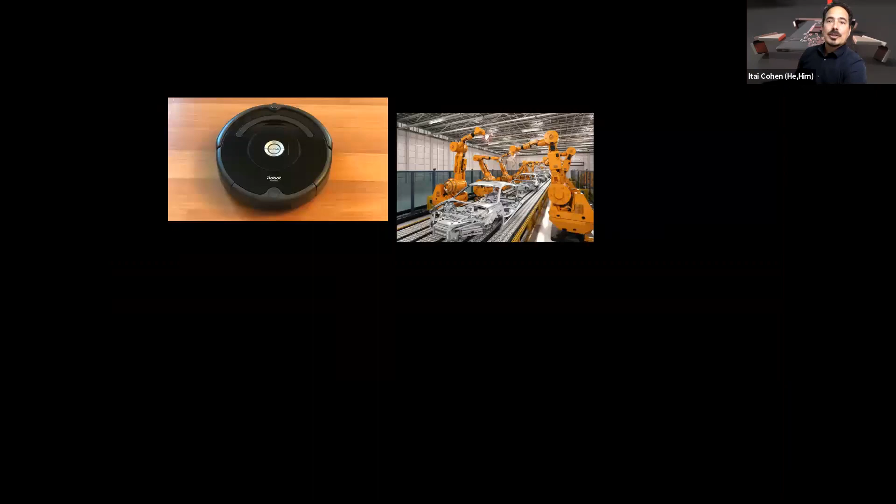Okay, so let me start by asking, what is it that's so fascinating about microscopic robots? Well, let's think about what robots do for us at the macro scale. At the macro scale, robots have really revolutionized our society. They sweep our floors, they make our cars for us, they transport people from one location to another. They organize our warehouses. They're used for surgery, and they explore distant planets. And the overarching question is what would it take to shrink robots with this degree of functionality to the 100-micron scale?

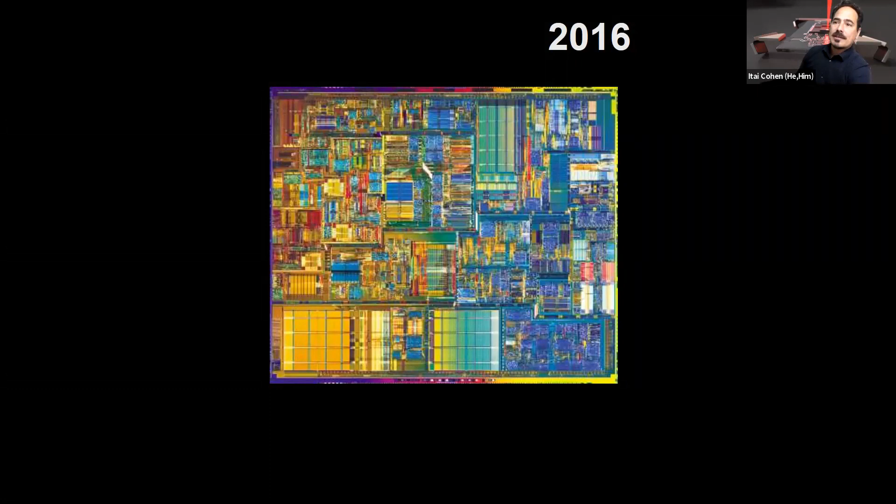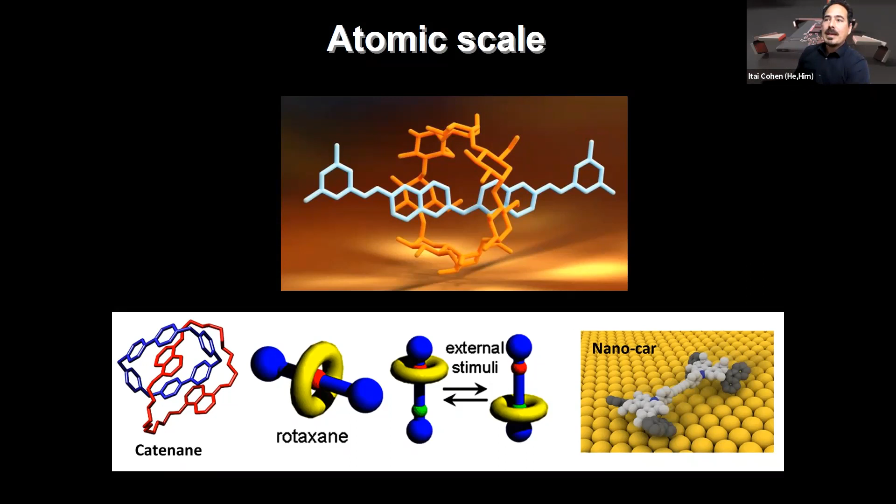And on the very bottom right is what I can only assume is the world's slowest car. It's a nano car where the rings that make up the tires rotate by some angle every time you put in a molecule that causes a reaction that twists the wheels. So these are spectacular achievements, and the synthesis that was required was really phenomenal. Still, they leave you kind of cold when you look at all of the amazing things that biology can do at this scale. At this scale, biology can create machines that cleave polymers.

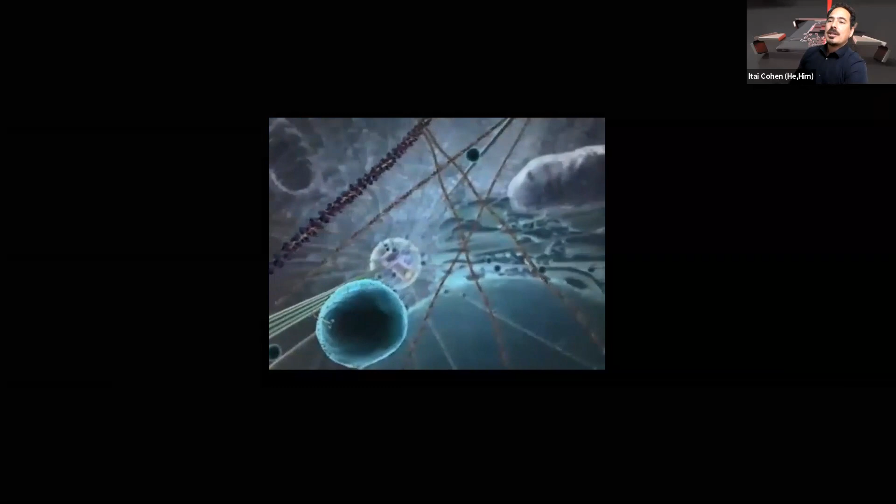They make polymers, they unassemble and assemble them. They can have little motors that carry cargo and walk across microtubules. You have pores that can open and close, letting certain chemicals in and out. You have a vast infrastructure of fibers that are controlling the rigidity of the cells or the pulling apart of DNA.

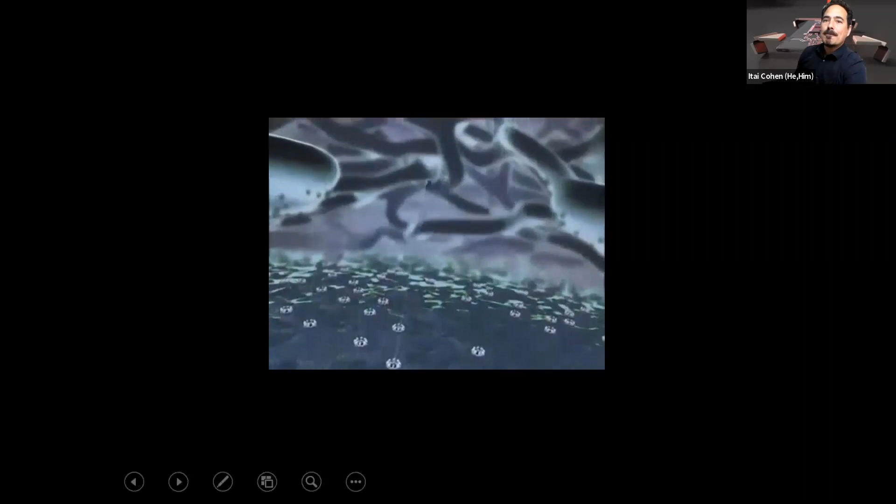And really, my feeling is that if you wanted to start working on machines at the molecular scale, you'd get a lot farther by just hacking biology, using all of the machinery that biology has already created, making variations in the DNA that codes for these proteins, and then using that approach to essentially search the space for something that does what it is that you want it to do.

Now, if you start looking at a slightly larger scale of microns, then a new technology comes into play, that of electronics. And the idea here is that we have an opportunity to make machines at the micron scale, which now take advantage of a different technology, one that is complementary to biology, and it's that of electronics.

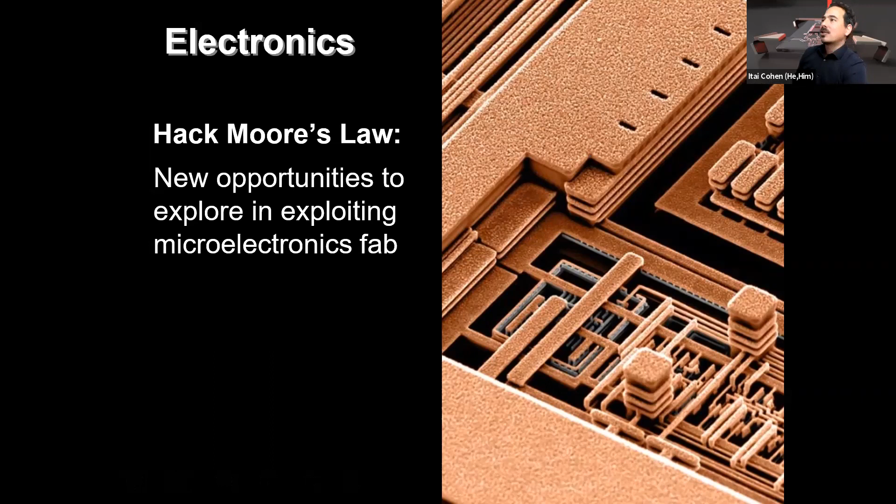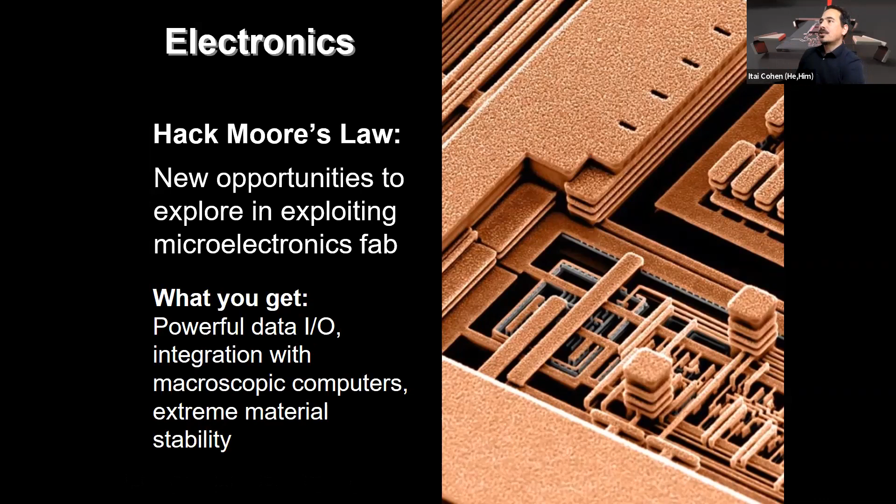And so the idea is that you could try to hack Moore's law, try to use all of the infrastructure that we've developed for electronics, and then use that to essentially make the brains of the robot, if you will. And now what's missing is how to marry that with the mechanical aspects that we want to make interact with that brain, or that we want the brain to control.

So let me start with the brains of the robot. I said that Moore's law allows you to create the brains. That's a solved problem. What is not a solved problem is taking that computer chip and moving it off of the wafer. This is something that John Rogers has been spearheading, and I want to tell you a little bit about the kinds of things that my colleagues are doing here at Cornell along those lines.

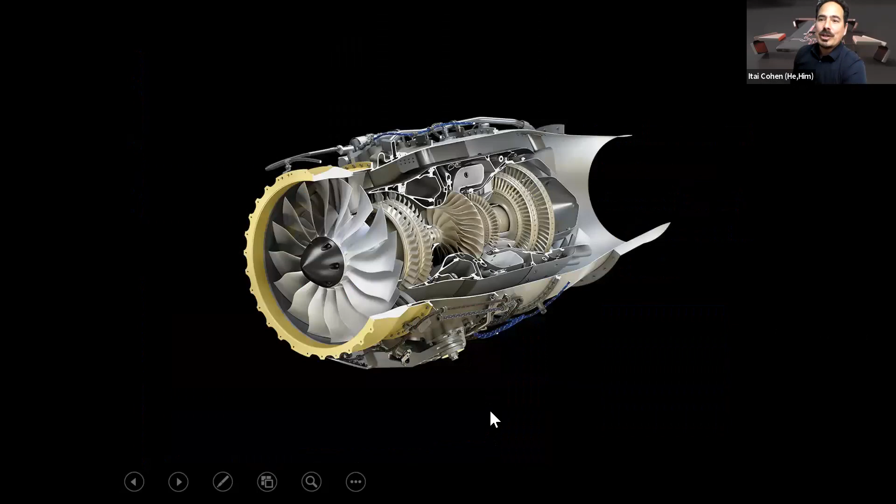So what we wanted to do is try to think about how could you start to marry the kinds of things that people are doing in this locomotory part with the kinds of devices that Al and Paul are making. And this was the task that we gave Mark Miskin, our postdoc at the time, who was leading our effort. Okay, so you might think, well, what's the problem? Let's just take machines as we know them and just try to shrink them down to the micron scale. This is a hard thing to do.

People have tried. So for example, here is an example of a micro turbine engine. It was made by the Epstein group at MIT. This was a $10 million effort that resulted in a very deep understanding of why it's not possible to simply shrink machines down to the micron scale and have them work. So this device never worked.

And the reason it doesn't work is that there's some physics that changes when you go from the macro scale to the micro scale. Fluids become viscous. Electrostatic forces inhibit surfaces from moving past one another. And of course, the assembly of these machines becomes more complicated. It's hard to shrink down your graduate student to the micron scale with a little micro screwdriver and get them to assemble something as complicated as a jet engine.

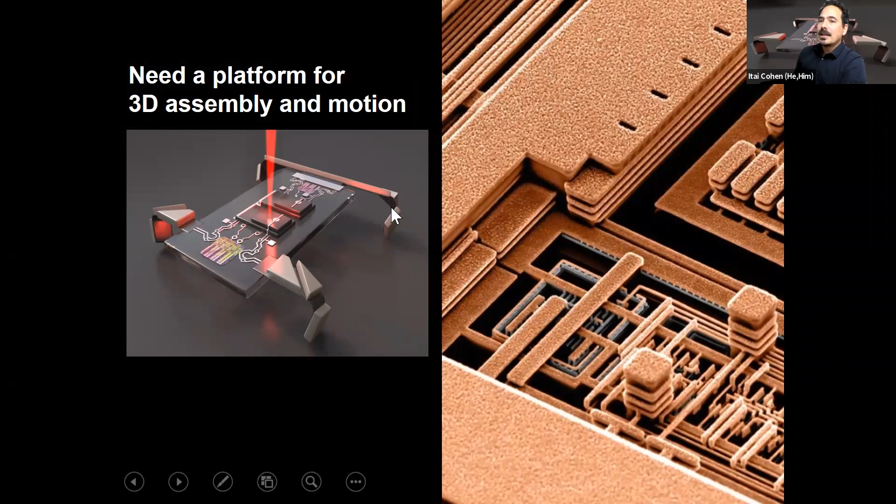So it really seems that if we're going to start to make machines at this scale, we're going to need a different approach, and the one that we're going to go after is to use the same techniques that people have been using to make computer chips to print a 2D robot, which then, using the rules of origami, folds itself up into a 3D robotic structure.

Let me stop there and just ask if there are any questions and if what I'm saying is clear so far.

Well, sorry, just to participate, and it has nothing to do with your wonderful talk thus far. What was the conference that you were at that sent you fleeing from rocks? Yeah, it was an Army conference on water. You know, it's kind of like a water scarcity thing. Yep. Yeah, so that was the conference. What a change! Phenomenal transition. Yeah, I mean, the stuff that I was doing there was on colloidal suspension. So it's stuff that we still do, but certainly not in the way that we did it at the time.

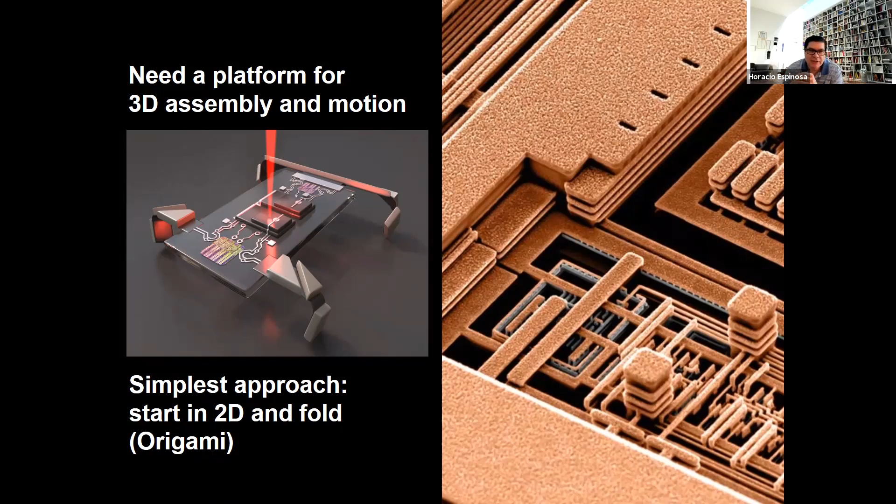Good. Is everything I'm saying so far clear, Ed? Yeah, I was going to ask if you could just say a little bit about why origami. Yep, I'll get to that in a second. Great. Okay. I was also interested in, maybe you will explain, what do you mean by origami rules, but maybe that is what is coming. Yep. So if these are the questions, let me continue.

All right. So why origami? Well, it turns out that origami has undergone a revolution over the last decade, in part spurred by an effort in the NSF to link up origami artists with engineers in order to take advantage of this 1000-year-old art form to make structures, devices, machines and metamaterials that have engineering purposes. So today, you can take a course at MIT on a program called Origamizer.

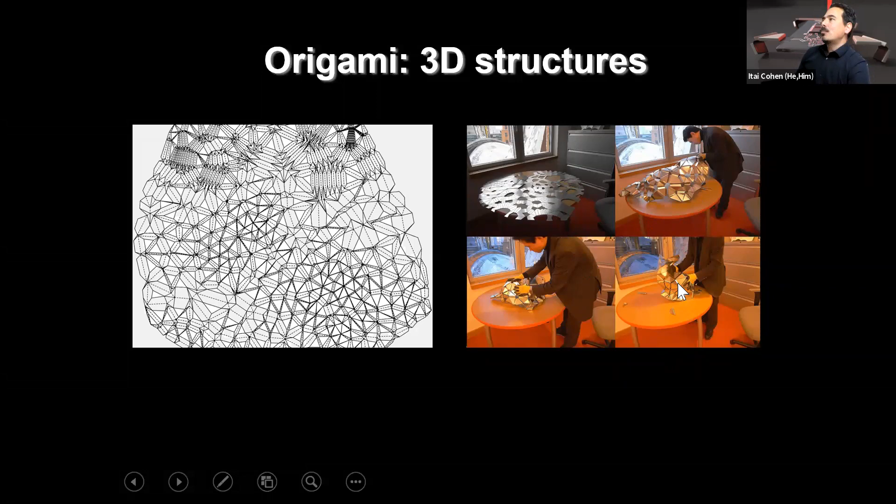Origamizer takes any 3D shape, it scans it, and then it spits out a folding pattern for that shape. So in this particular case, this origami pattern, if you have an origami master like Tomohiro Tachi here folding it for about 8 hours, will essentially form the Stanford bunny, okay? So any shape that you want, basically, we can form using origami.

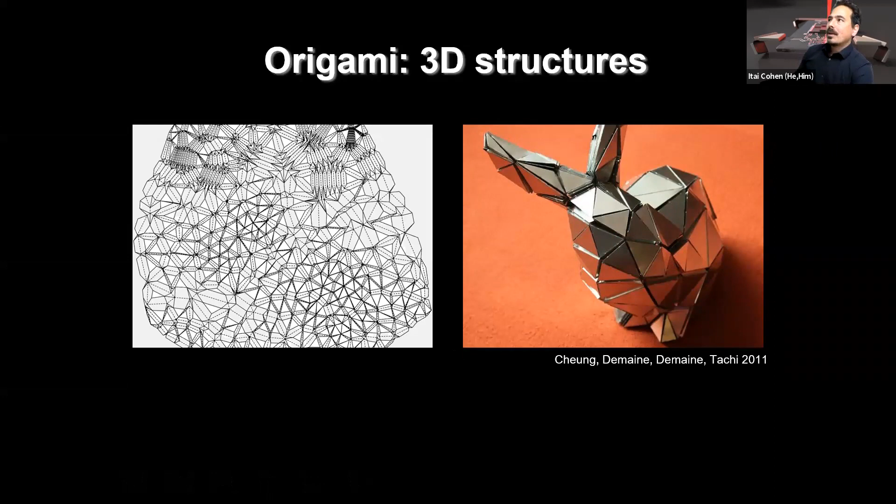My group was involved in this effort in the aspect of mechanics. So what we were interested in is how do you take origami materials and use the way that they're folded to imbue the mechanics that we're interested in on these sheets. So for example, if you take a normal Miura-ori sheet, and if you look at panel C here, if I pop through defects, I turn a valley into a mountain in a particular order, I can pop those defects in so that I can create a hinge. And so this sheet can essentially fold on that hinge.

If I take that same sheet and I pop a different configuration of the defects, I can make a rigid spine that does not allow any folding. So now the sheet is rigid along that spine. And in fact, we showed that you can pop these defects in and out at will to reprogram the mechanical behavior of this sheet and make it stiffer, make it so that it can't bend in certain ways. All of this just by popping these mountains and valleys into one another.

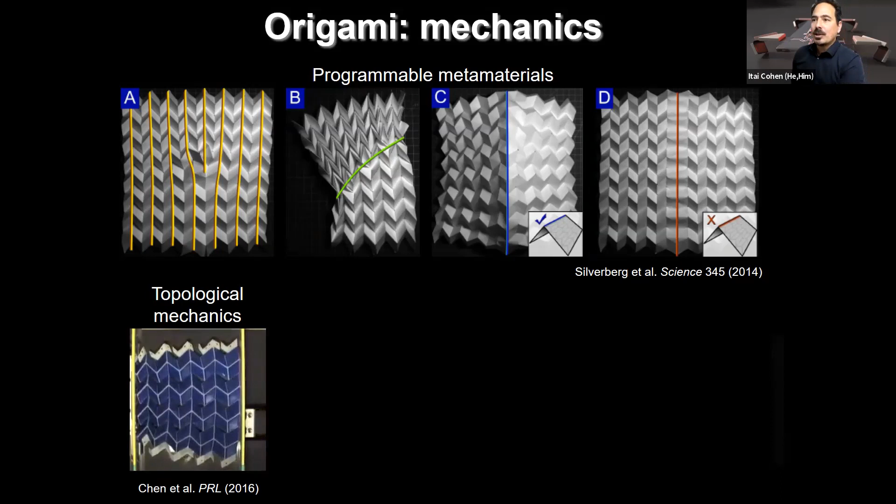In another piece of work, we showed that by changing the pattern of folds, you could create a topological mechanical material where if you compress it, only one side of the sheet deforms. This is the equivalent in the topological electronic materials of having the current only going along one edge of the material. We showed how to create bistable switches. In this case, you're seeing a device that folds or essentially snaps between an open and a closed configuration. This is the square twist.

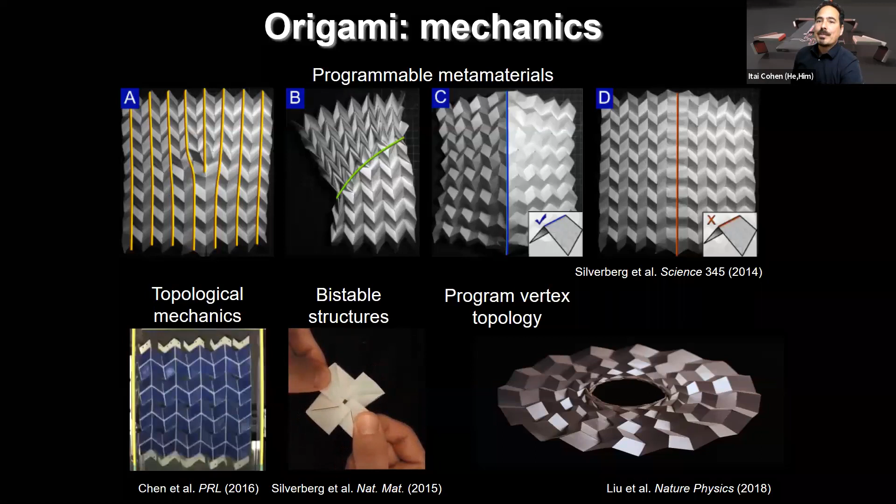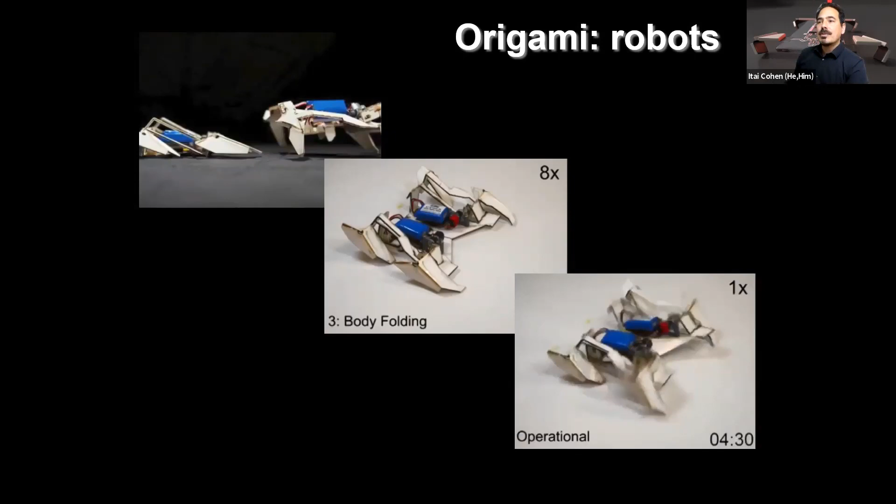Now, admittedly, 80% of these robots caught fire as they were running off the stage, but you get the idea. The vision of printing something in 2D and then getting it to fold itself up and walk, that's a spectacular idea. And we know how to do the shapes, we know how to do all of the mechanics. And so the only thing that's remaining is to shrink it down to scale. And origami happens to be a terrific platform for that, because as long as you keep the ratios of the panel to the sheet thickness the same, you can essentially create the same structures in the macro scale as you do at the micro scale.

So in this particular case, you're looking at a Randlett bird. This one is made out of paper. This one was made by Ryan Hayward's group out of a polymeric material that expands with temperature. It's poly-NIPAM. You take the poly-NIPAM, you sandwich it between two rigid plastics with different gaps at the creases. So if you have a crease where the gap in the top is bigger than the gap at the bottom, when the poly-NIPAM expands, it's going to bend because the top has more room to expand. And that creates a fold, and that's what allows you to make this bird at the micron scale.

Now, if you want to go even smaller, and if you want to start to think about integrating hard materials from the fab, you really need to think about what paper you're going to use at this scale. An origami artist is only as good as their paper. And so right around the time that we were starting to think about this, Paul and his colleagues were starting to experiment with the thinnest paper that you could possibly imagine.

This is a single sheet of graphene that Paul's student, Melina, is pulling in between these two pads. And what you're seeing is a kirigami pattern. Kirigami is where you make cuts in paper that have this staggered shape. And what Melina's doing is she's pulling the pad and then extending out this kirigami pattern, but now in a single sheet of graphene. And so we've then gone on to make other types of paper.

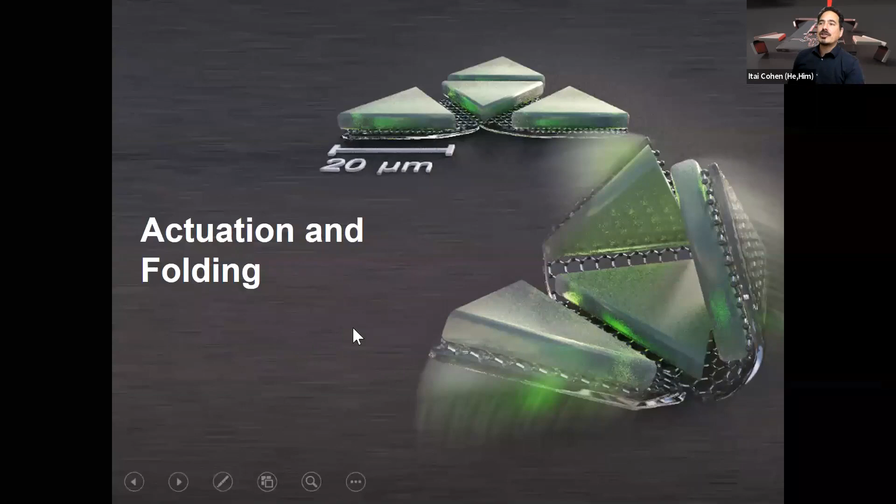Okay, so let me tell you about some actuation and folding ideas. I'll tell you about 2 methods that we've been trying out. One is chemical and the other is voltage driven. Okay, so if you want to self-fold something, what do you do? Well, first, you have to take your device and you have to make it asymmetric so that it only bends on one side. Essentially, you're making a bimorph.

Bimorphs used to be used as little switches, little fuses. It's like when you take 2 pieces of metal, slap them together. If they have different coefficients of expansion, one side will expand more than the other, and you'll get a bend. All right, so in this particular case, our bimorphs are going to be atomically thin sheets, but it's the same concept.

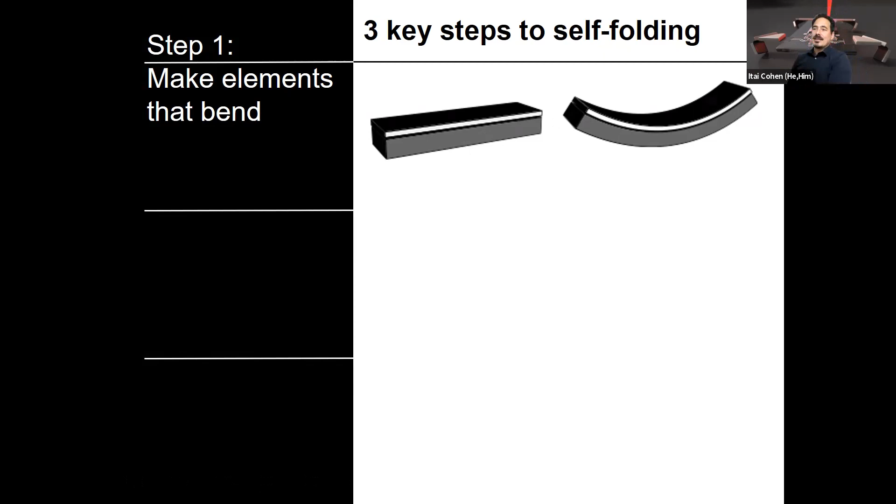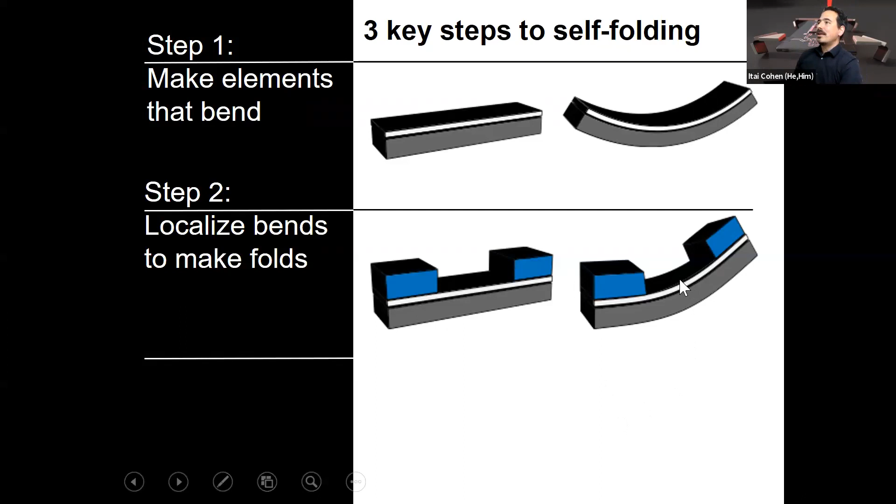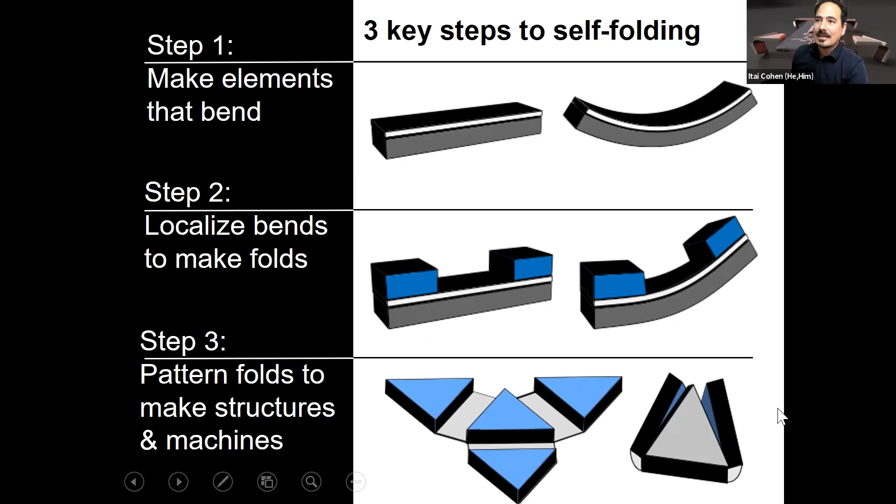Then, if you want to localize this bending, what you can do is you can put massive panels, little rigid panels that prevent the bimorph from bending underneath them. That restricts the bending to a fold. And then you can make your fold pattern follow any kind of origami that you want in order to generate a 3-dimensional shape. So that's the strategy. Let me show you how we do it.

So this is work that Marc Miskin did. What you're seeing here are the plastic panels, and what's really devious about this video is that the hinges, they're invisible. You can't even see them. The hinges are made out of 1 sheet of graphene and 2 nanometers of glass. That's our bimorph. And what Marc does in this video is he puts some acid on, and that closes the structure. And as the acid diffuses away and the system becomes more basic, the structure essentially opens back up.

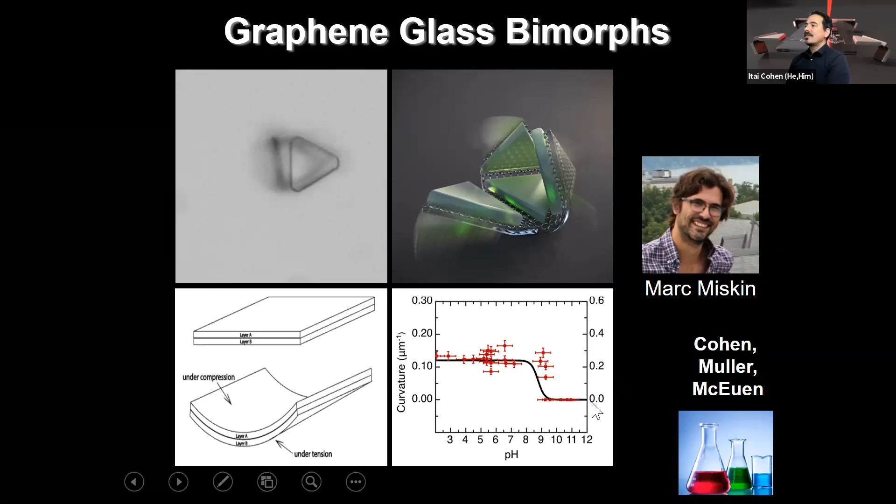And so what you're seeing is that the glass, in this particular case, is responding to the pH that we're using in the material. And it goes something like this, that when you're at high pH, the glass opens up and has a curvature that's 0, it's flat. When you're at low pH, when you put some acid on, that's what makes it close up. So the chemistry behind this is, of course, spectacular.

This has a very rich and storied history dating all the way back to Josiah Willard Gibbs, who was interested in equilibria between solids, chemicals diffusing into solids, and the solutions that the solids are embedded in. And so way back when, in 1906, people already knew that you could use glass as electrodes, as little storage devices for ions. And eventually Kistler and then Larche and Cahn started to understand that if you used, for example, sodium nitrate or potassium, you could essentially create stresses in cover slips that either bowed them out or bowed them in.

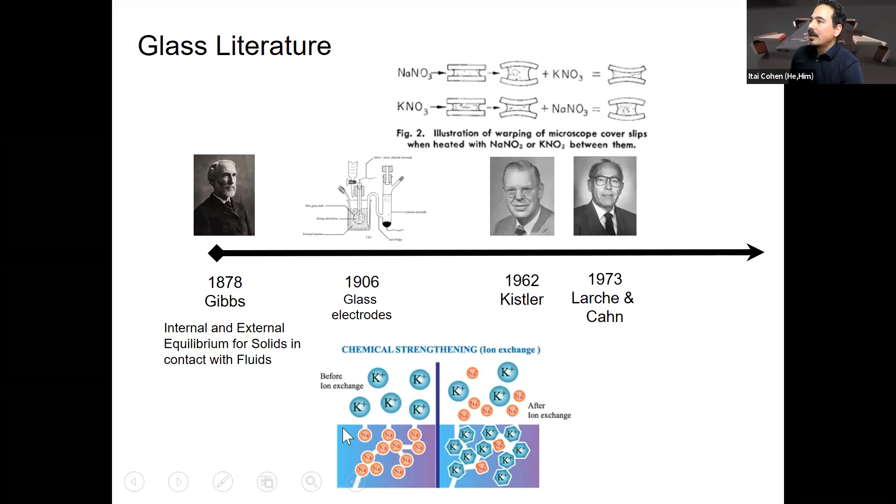And Larche and Cahn really figured out the mechanism that's at work here. What they showed is that when you put potassium into solution, the sodium in soda lime glass, so all glass is made with soda lime and has sodium ions in it, the potassium ends up displacing the sodium, and that expands the glass. So when you put in potassium, the surface that's in contact with the solution ends up expanding relative to the other surface, and you get bowing of the cover slips.

And when you do the opposite, when you put in a large amount of sodium, you displace the potassium, and now the cover slips can bow inwards. And so this, of course, is the mechanism that you all know about, because it's what's used to make the glass in every single one of our cell phones. So this is an amazing piece of engineering where you essentially take soda lime glass, you dip it into a potassium-rich mixture, and that creates a potassium-rich surface to the glass.

Now, when you scratch a Gorilla Glass, what happens is that instead of opening up, the system is under such stress that the scratch actually closes, because the potassium is trying to expand the glass, and so it closes into the crack. And that's why Gorilla Glass is so tough. It doesn't pull on the cracks, it actually closes them up. Amazing. So this is exactly what we're using to do our bending in this particular case.

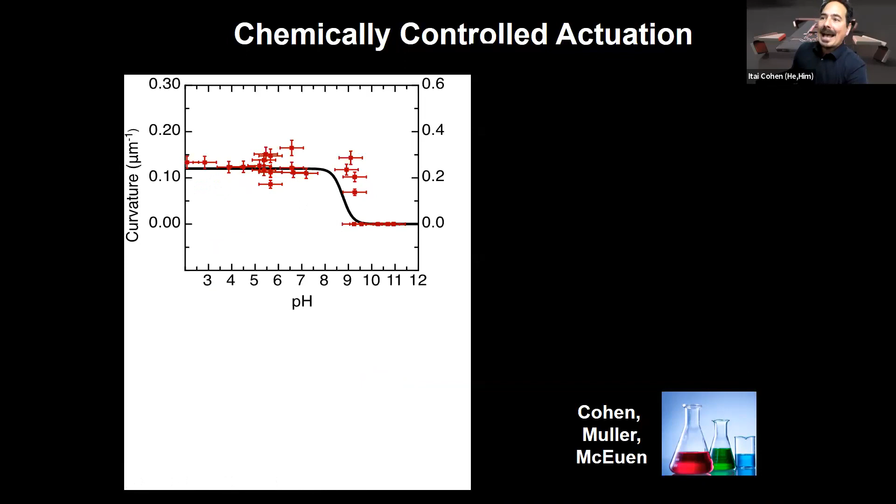All we're doing is replacing the sodium with acid molecules, H3O+, and the idea is that the acid diffuses into and out of the glass. When it diffuses in and displaces the sodium, it essentially swells the glass, and when it diffuses out, the glass returns to its normal state.

And so we can fit all of this data with this black curve, and that has the form which is just 1 over the rate constant, which is pH dependent and sodium dependent. So if we change the sodium concentration, we can change where this transition happens. And if we change the pH, then we get this nice step function from one state to another.

And all of this happens super fast. This folding and unfolding that you saw happens quickly because it's all just taking place at the nanometer scale. All you're doing is replacing the very surface of the glass, and the time scale goes like the diffusion. So if the length goes very, very small, then that time scale becomes minuscule. And that's why this thing happens at the sub-second time scale.

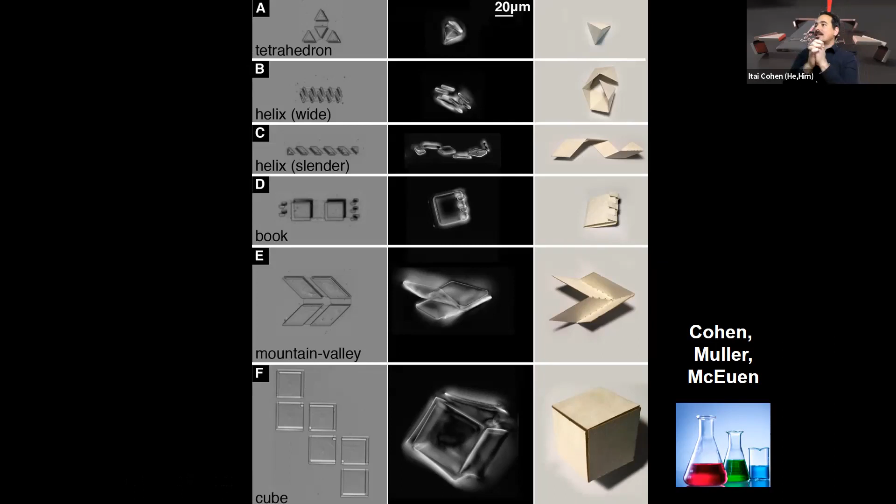Okay, so with this, we were able to make all sorts of devices, little tetrahedra, little spiral shapes that could be used as antennas, a book that closes on itself and clasps shut, a cube. And this particular image of the cube graced the cover of PNAS.

And we got a lot of attention for this, including from Breitbart News. That's right, this is no longer fake science, it's real stuff, and you can believe it.

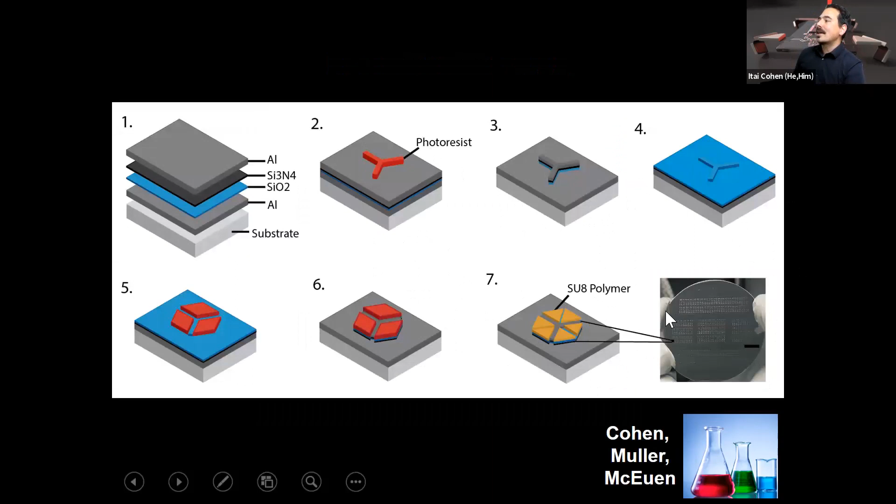That relationship between curvature and pH almost looks like it's just piecewise constant. Is there something desirable about making it a smooth function? I would say that this is kind of a log scale. pH is a log scale. So the fact that it's going down pretty sharply basically makes it like a switch.

There is some smoothness, and you can try to do that in the delivery, but the device itself, the stresses, respond. So the higher the concentration gradient, the faster this thing will go. So it really depends on the delivery of the acid, how quickly this thing will snap down. Thank you. Fascinating.

Any other questions about the chemical actuation? So Itai, have you ever tried soft materials? The same phenomenon instead of using glass, because certainly polymers or other organics could respond similarly, particularly if they're charged. Yep, absolutely.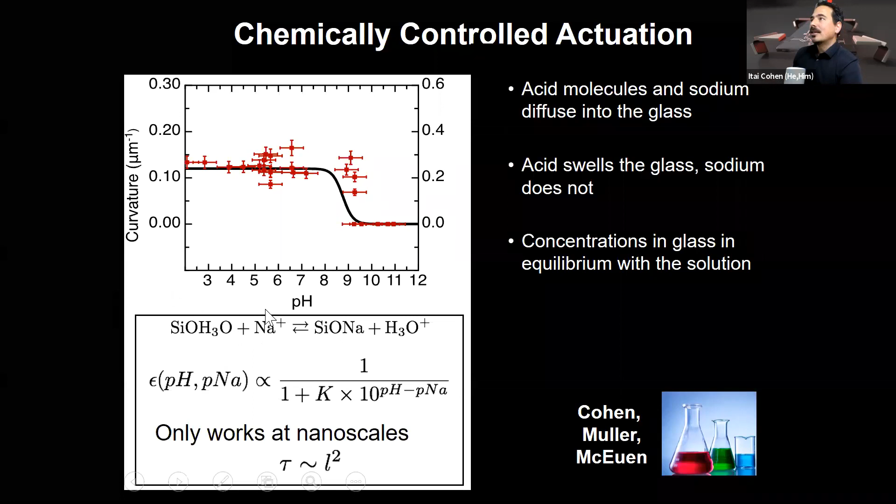I mean, you can also introduce light responsive. Yep, you can do azobenzenes that are responsive to give you liquid crystals that essentially can be disordered and ordered. We're pursuing those kinds of things. Yep. Great. Okay, let's hold off on the rest of the questions.

Let me tell you about another process that we've been developing. So this one is an electrochemical actuation. What we do here is the bottom layer is going to be made out of platinum. The top layer is just an inert capping layer. It could be either graphene or titanium dioxide or something like that. And when you put a voltage on the platinum, you can adsorb anions onto the surface. And those ions essentially create a surface stress. And that bends the sheet because the other side is not adsorbing ions, so it's not feeling that stress.

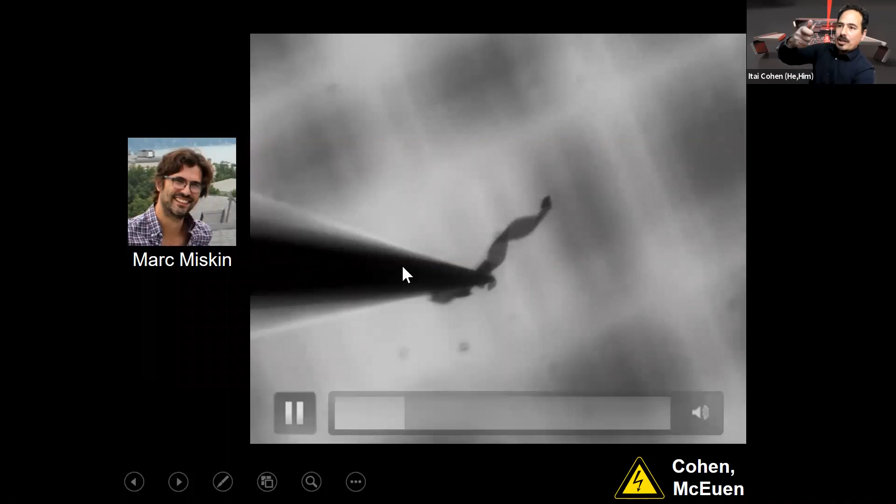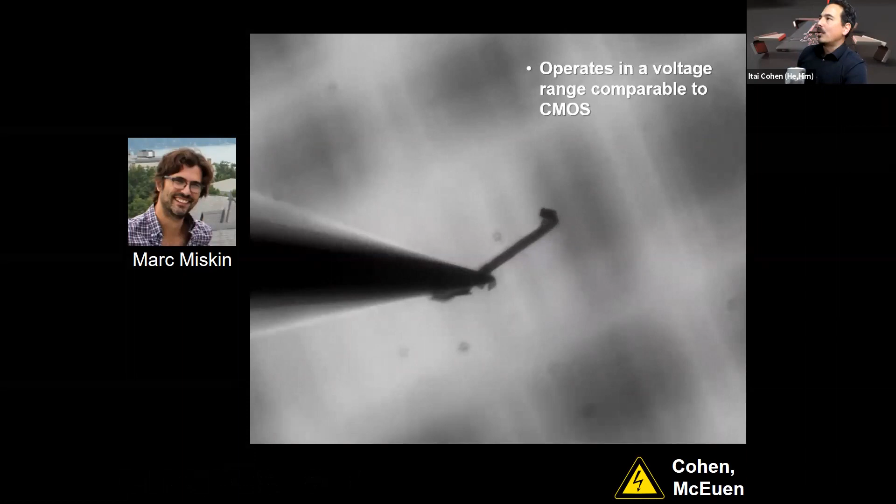So if you do this, then you can pick up one of these devices like Marc is doing here with an electrode, and all you've got to do is tune the dial, and this sheet will bend and unbend on command. Okay, it's really an amazing piece of engineering. And this device operates at voltages that are comparable to CMOS, so less than a volt or so. It consumes very little power. It's rate limited by the viscosity of the water that surrounds it. It works in cell media, and it integrates with the electronics fab.

So let me tell you some of the things that we're trying to build off of this technology. So one of the things that we've thought about is, could we start to think about creating artificial cilia? So as you all know, in your body, there are two main methods for transporting fluids. One is the circulatory system. Your heart is putting pressure on some fluid to drive it through the channels that are your arteries and veins. And that technology, I should say, has been developed into an engineering field called microfluidics, a major field in engineering.

But there's another technology that the body uses to transport fluid, and that's cilial transport, where cilia can essentially locally move molecules of fluid across surfaces. And this cilial transport, we haven't really figured out a good way to incorporate it in engineering devices. And part of that is because the best cilia that we can make right now are magnetically actuated, which is difficult to change. Other electronically actuated cilia use voltages in the range of 1,000 volts. But here we have a chance to make little cilia that are operable at the volt range. So let me show you the kinds of things that we can do.

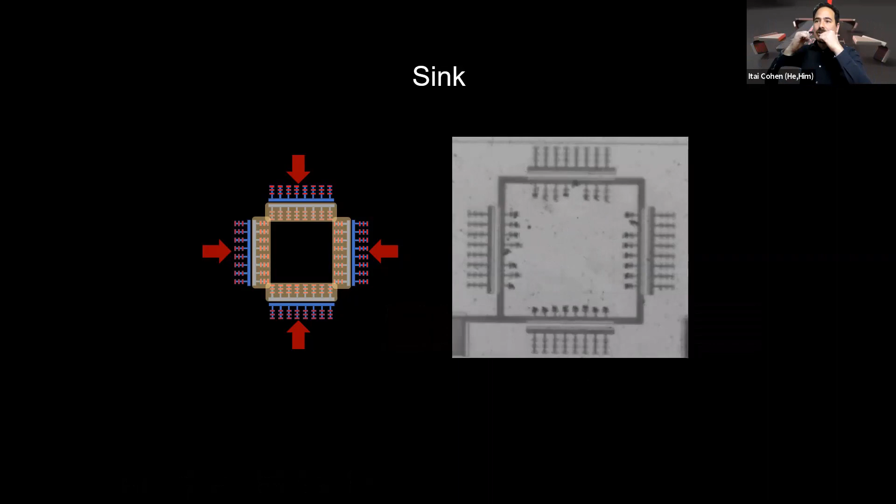That creates a sink flow. And the flow is coming in and then moving out of the page into the third dimension using the cilia transport. And of course, I could actuate any number of combinations. So for example, if I actuate all the outer ones, I get a source where now the fluid is coming in from above and going out in plane, or just parallel transport, or I can get a saddle shape where they come in from above and below and out through the sides, or just a turning flow.

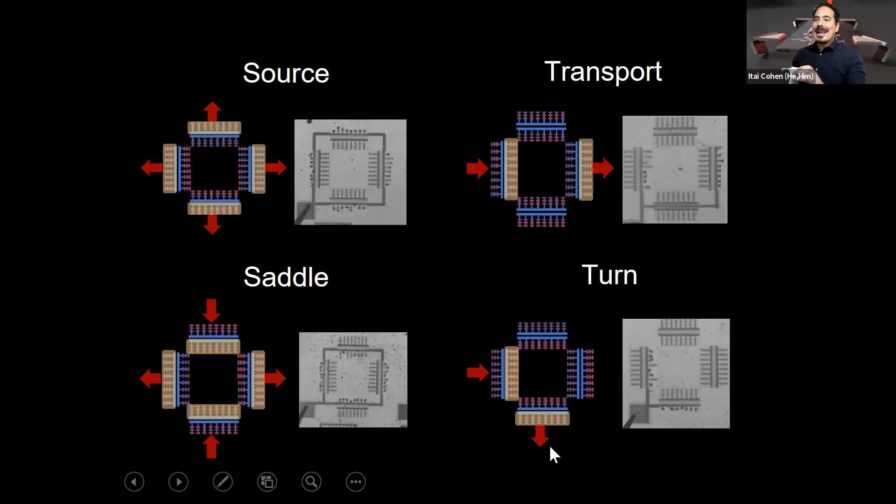And now if I have a whole array of these, I can essentially create a flow pattern in the top part of the array that sends the particles going in this direction. Whereas if I actuate the bottom ones in a different pattern, I can get a completely separate pattern. And maybe if these two are operating together, then only in this regime where the two flows are near each other, do you start to exchange materials between the two flows as this fluid is being directed.

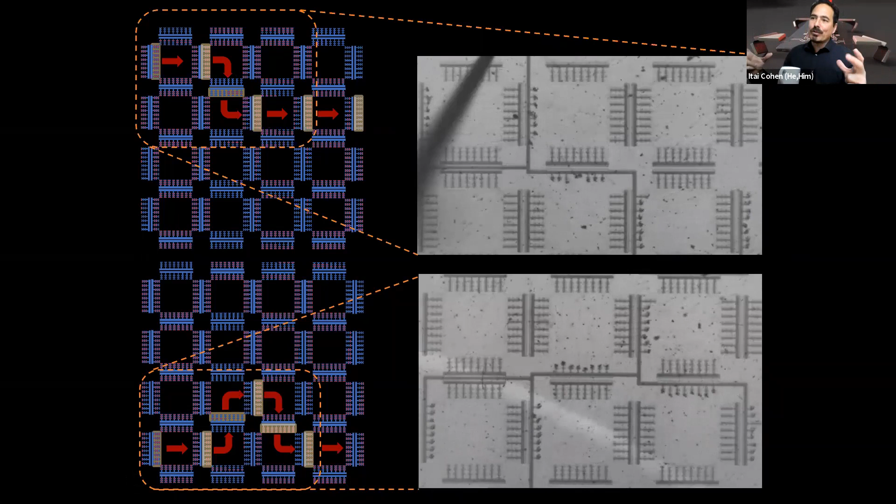And all of this can sit inside of a microfluidic channel in order to give you a sub-channel mixing or flow behavior that you might be interested in. So we're working on that. We're making these little devices that can be actuated electrically. In this particular case, we have a chip that's sitting on this 128 pin connector that we can then activate with a DAC and a computer program like LabVIEW.

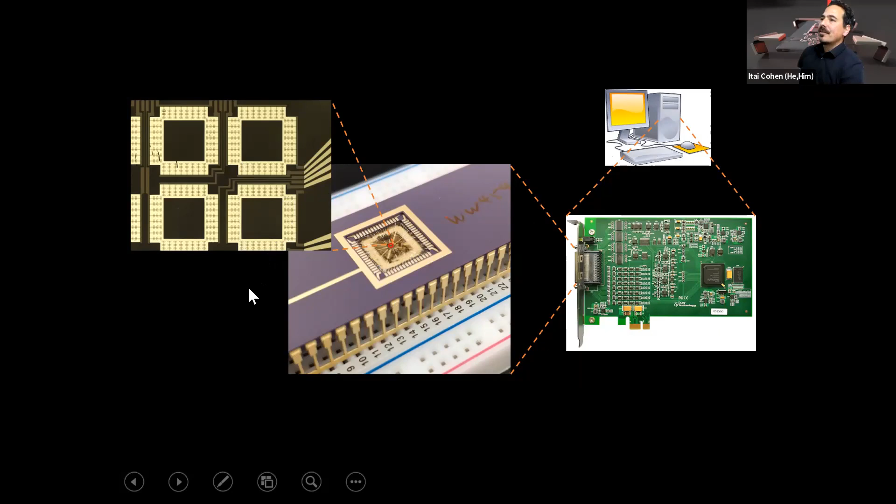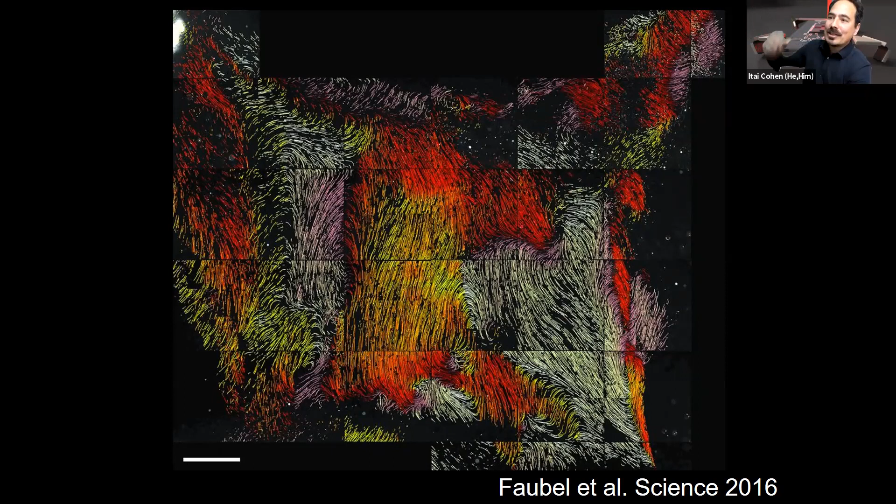And with this type of surface, you could really create any flow pattern that you want and try to mimic the kinds of things that are happening in our body. In this particular case, you're looking at a cilial transport from cavities inside your brain that have carpets of cilia moving neurotransmitters in different directions. And these carpets can essentially move these neurotransmitters in response to your mood. So as your mood changes, the transport pattern will change as well.

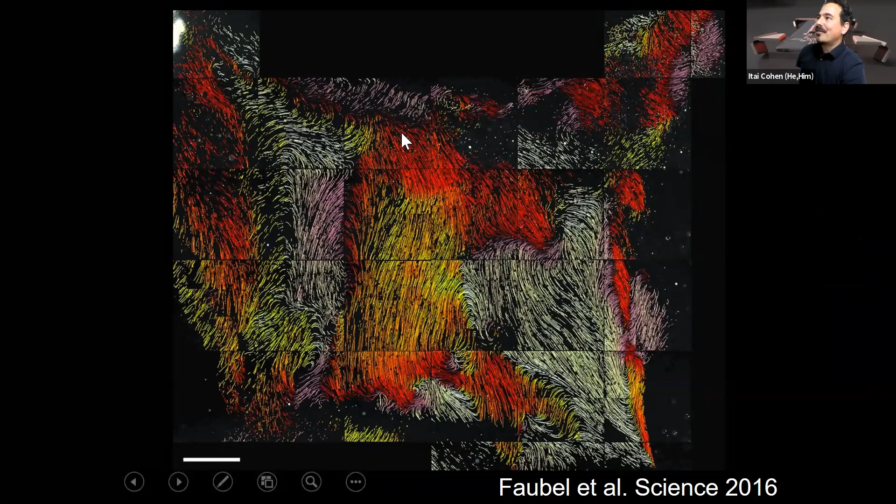And so these are the kinds of things that we're going to start to be able to mimic and maybe even investigate in slices of brain. We can move the neurotransmitter in a different flow pattern and see how that affects the brain function.

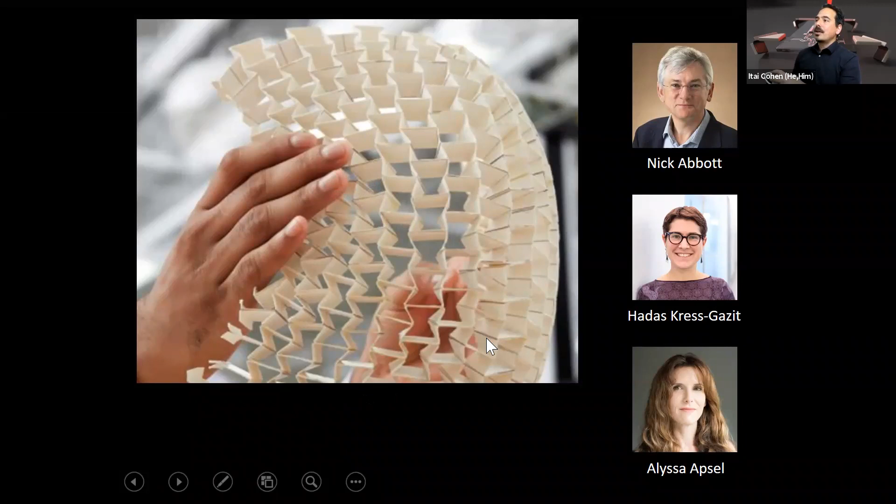If you now take these and again put these panels on, then you can direct the folding to occur at a hinge. And now you start to open up all the world of origami and kirigami for these electrically driven actuators. So for example, with Nick Abbott, Hadas Kress-Gazit, and Alyssa Apsel, we're creating metamaterials. These are sheet-like devices that you can print, and then by actuating some subset of the hinges, you can make it adopt three-dimensional geometries that will hopefully someday allow it to locomote and then maybe wrap some sort of chemical source. So this would be a robot that we're trying to create.

So we take advantage of this bidirectional folding, and this time what we're trying to do is create a metamaterial where we can get a splay between these two panels. And the way we do that is with an origami hinge, which is composed of a mountain fold that can create a 180-degree fold, and two valley folds, these dashed lines, which can fold to 90 degrees. And when we actuate this origami hinge, we should be able to get a splay between the panels. Is that clear?

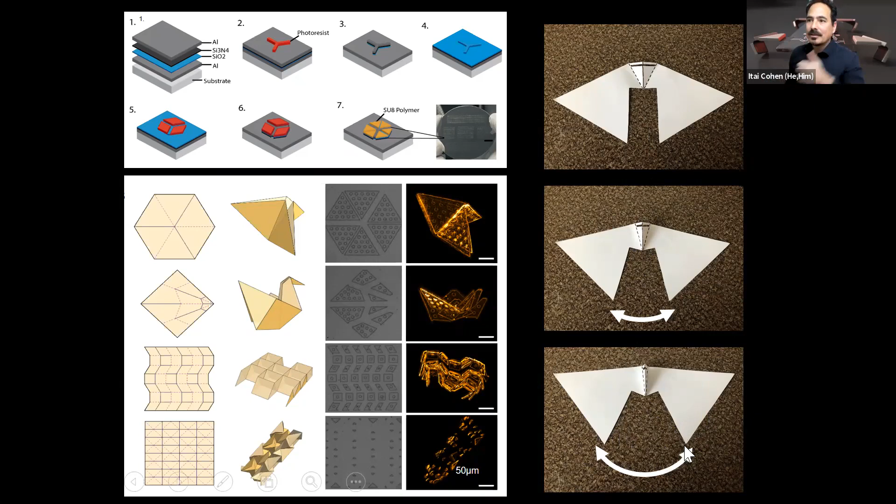Okay. And so this is what you're seeing in these videos where Qingkun and Wei have made these metamaterial sheets, and each of these hinges is only 5 microns across, okay? And in this particular case, we're activating the entire sheet. So every hinge is being activated simultaneously through a voltage that's being sent from the bottom to the entire sheet.

On the very bottom right, you're seeing a device where we've tethered the surface or the outer edge of the device to the bottom surface. And that means that if the middle part is increasing in area, it has to be bowing out of the plane in a 3D bubble. So you're seeing something that can create a shape moving out of the plane.

And the next thing that we're doing, which is probably going to happen in about a week or two, maybe after March meeting, we're now creating these sheets where we're wiring it up so that we can have 2 inputs, one for one set of hinges, another for a different set of hinges. And by changing the voltage on the 2 wires that are coming into the device, we should be able to get a range of shapes for this 3D surface in both the square metamaterial and the triangular metamaterial.

If we take these same actuators and instead of working around 0.2 volts, we start working at 1.5 volts or 1.2 volts, we can get oxidation and reduction reactions to happen in the platinum. So you start with a pristine layer of platinum capped on one side by titanium dioxide. And as you drive the voltage up, you can get the oxygen atoms to adsorb and then be driven into

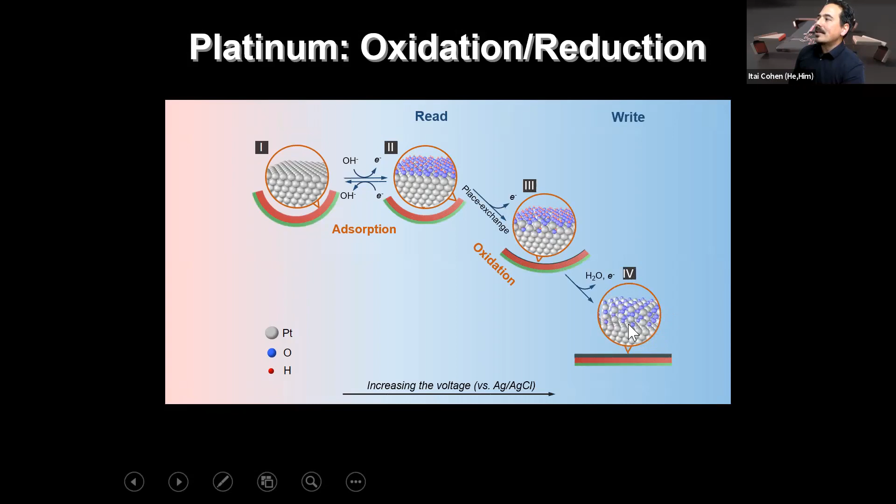the platinum itself. That creates a surface stress, but it also piles oxygen atoms at the surface of the platinum so that when you take the voltage off, there's a barrier for the oxygen atoms to diffuse out of the platinum. And that leads to a hysteresis loop. And these oxygen atoms don't really come out until after you apply a negative voltage to drive them out. And so this hysteresis loop leads to shape memory.

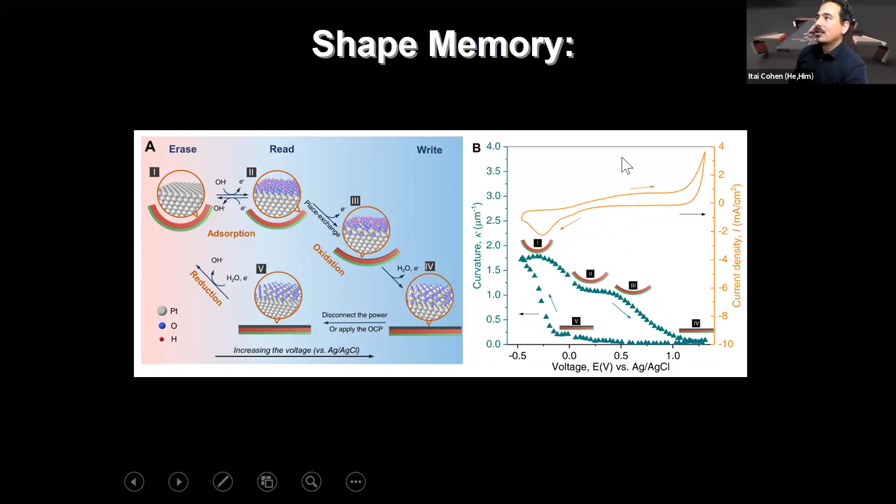So this is the curvature as a function of the applied voltage. And the point is that you can go along this point all the way back down to negative voltages before the curvature changes. So you can have two voltages, but the same curvature. That's what we mean by a shape memory material that can retain its shape. So here you go. This is a gripper where we can take the electrode off, it retains its shape. Now you put the electrode back and it can retain its shape in a different state. That's what we mean by a shape memory material at this scale.

It's different, the mechanism is different from the SMAs where you have a martensitic phase transition between states. Here, you're really driving ions into the material, and the barrier that the ions form for them to come back out is what gives you the shape memory behavior.

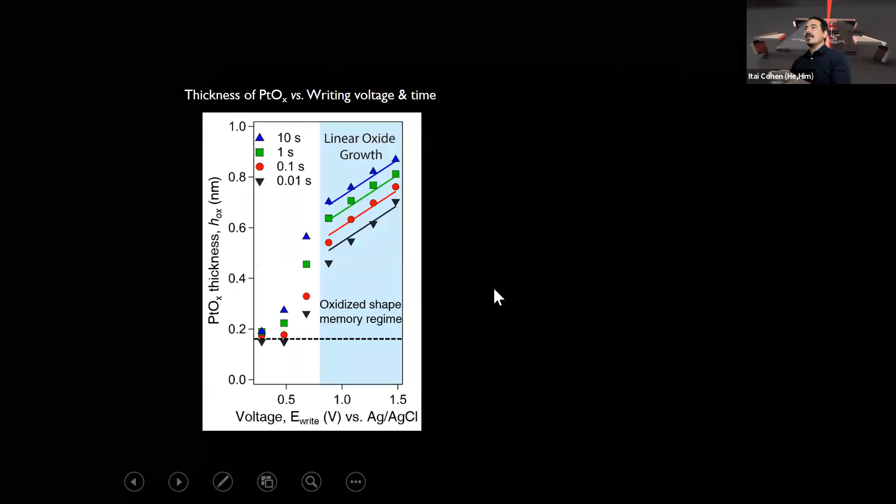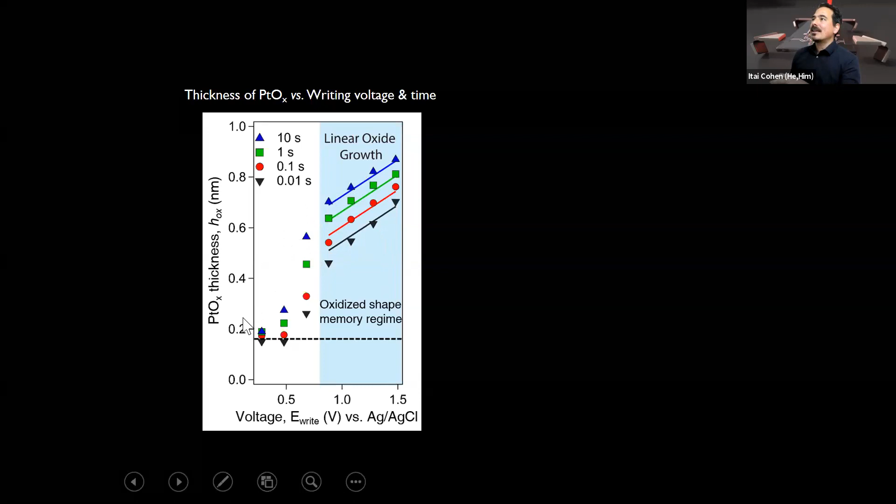And there's a nice bit of physics that we figured out on how to predict the amount of time and the voltage that you need to apply in order to get the oxide to form a certain thickness, which then translates to how much curvature you can generate. So we know exactly how much voltage and for how much time you need to apply that voltage to get a bending that you're interested in from your material.

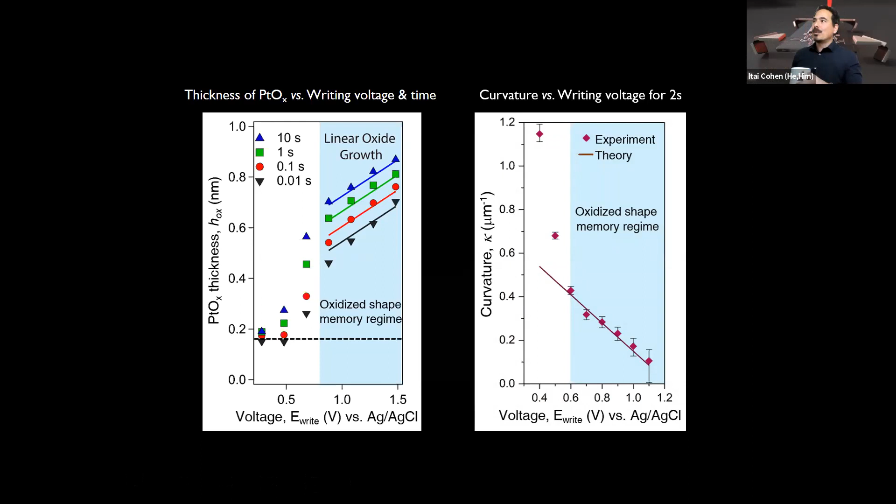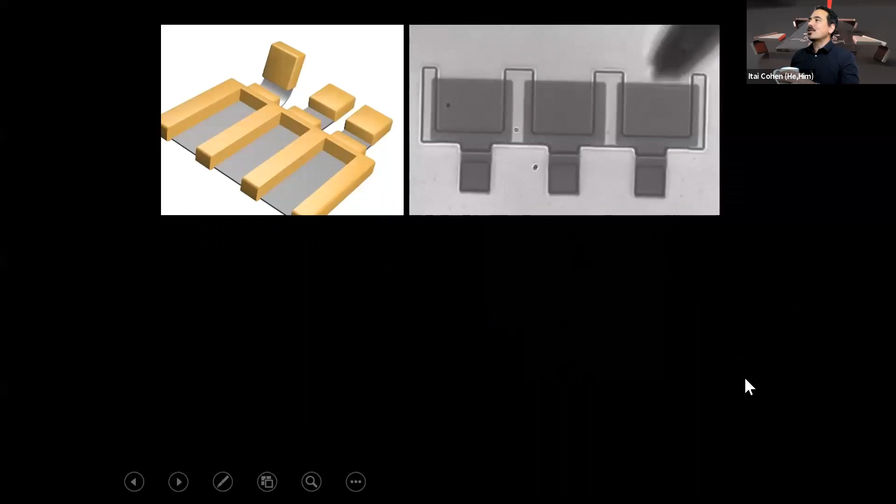So we can make these devices in series so that you can touch each individual pad and they're insulated from one another. So only each pad is actuated at will. You can create pads where you have the first pad actuating the first hinge. The second pad goes through a wire in the first hinge to the second hinge. So now I can activate the first one and I get the first hinge, and then I can activate the second one and only the second hinge is actuated.

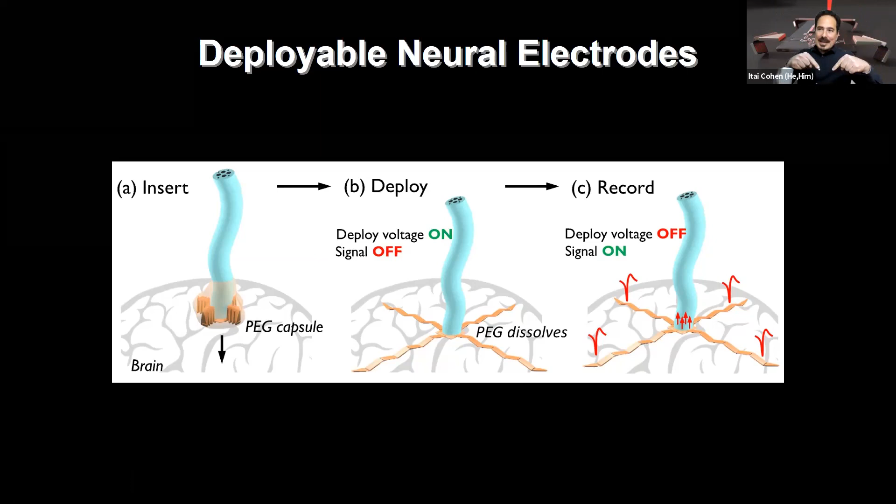And with these kinds of motifs, we can start thinking about deployable neural electrodes that are introduced into the brain in a compact form that we can then actuate the hinge using one voltage. And then through a separate wire that's insulated, we can start to record from neurons that are laterally displaced by millimeters inside the brain. And this would replace the act of essentially using ice picks to go through the brain in multiple locations to be able to test the correlation laterally between neurons.

We can create actuation stages. So these are devices that essentially can be repositioned either in the Z or the XZ direction. And again, they can retain their shape even when we disconnect the power. And then we can connect the power again and get them to go back to their original stages. And that's what you're seeing here.

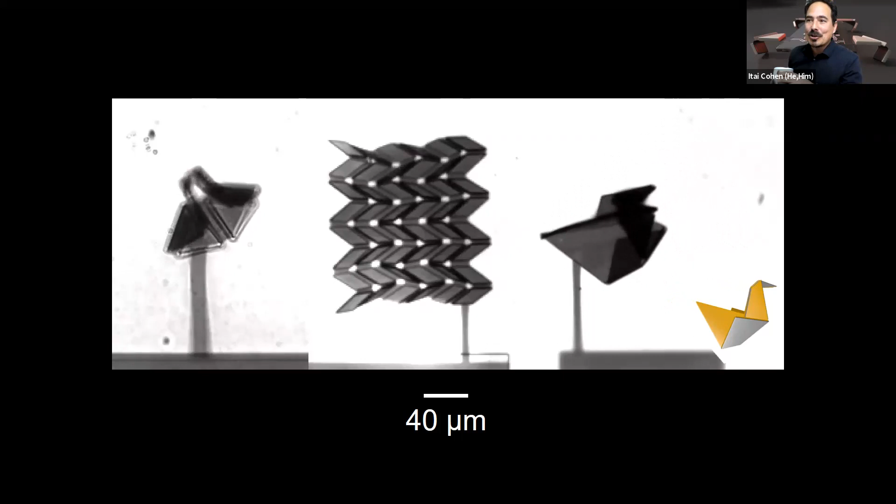We can do the same kind of electrical actuation, but now with origami. You have a hexagonal pattern here, a Miura-ori, and what is now the world's smallest bird actuating at something like the 40 micron scale. These patterns are smaller than the footprint of your hair. You can take a hair diameter. That's how big these devices are.

And you can, again, actuate them and unactuate them at will. They'll hold their shape, so you can use critical point drying and generate these beautiful origami structures that you're seeing in the SEM. And as you can see, we really are working with atomically thin paper. These bright yellow regions are 10 nanometers in thickness, and the rest of these pads are only a half a micron thick.

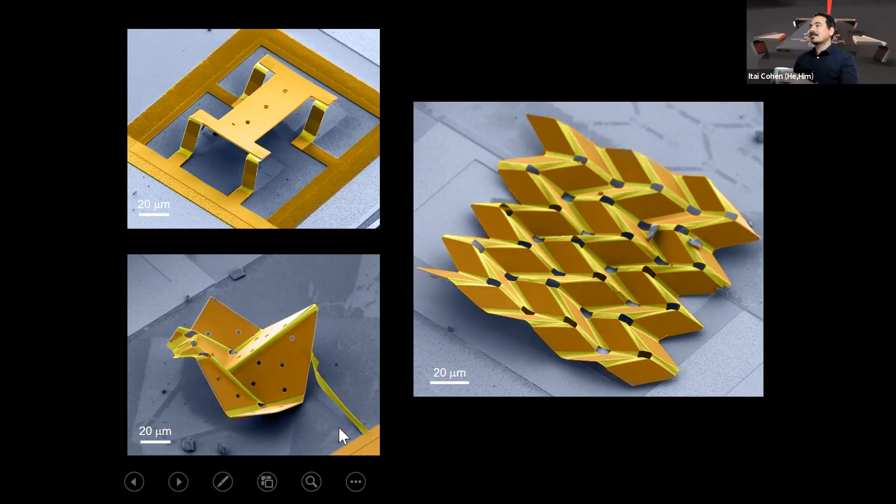Okay, so let me just finish off by telling you what we would like to do with these. So the ability to make the world's thinnest actuators, which is this work over here, we're plotting for you voltage versus the actuation curvature. So these devices work at some of the lowest voltages and some of the highest curvature folds that you can generate.

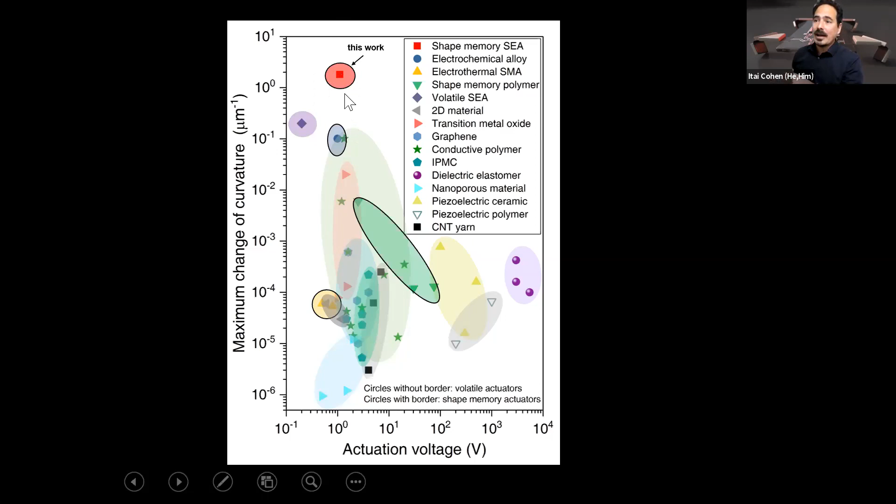And so that's important because if you want to start making robots, if you're working with these materials, you can make robots that are macroscopic. Working with these materials, including some of the soft materials that Sam was describing, allows you to make milli-robots. But if you want to make really micro-robotic systems, then you've got to be actuating at a level that's sub-micron, so at the 500 nanometer scale, which is roughly where we're at. And now you can start to build the micro-robots that we're interested in.

So how would you go about doing that? Well, you can start to put them in contact with electrical devices like a photovoltaic here that you can shine light on. And if we attach it to one of our devices, then by shining light on this, you should be able to get the device to actuate. And this is what you're seeing in this movie.

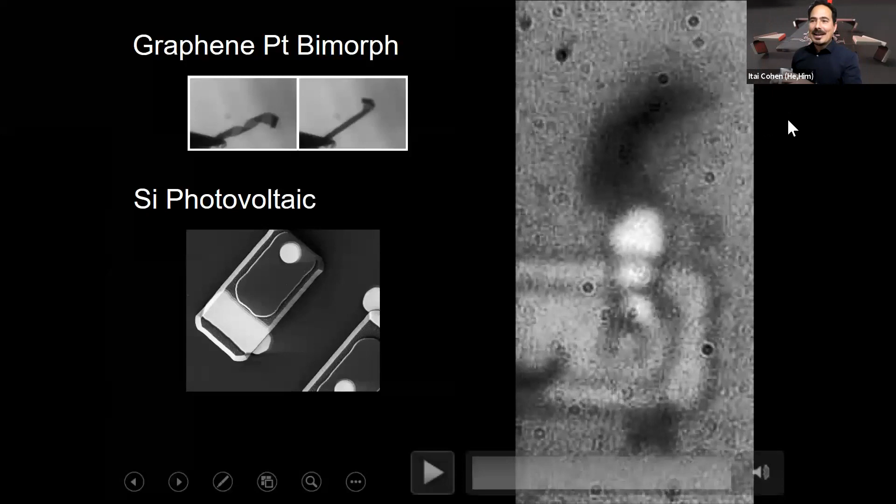Marc shines light on this photovoltaic, and this thing is waving hello at you. It's a very small wave. I'll play the movie again. But it's still a wave nonetheless, kind of like the Queen. We're of course interested in more of an American wave. That's where we'd like to be, but okay, it gives you the idea of what could be done.

Now you start to get greedy. So you make a front photovoltaic and a back photovoltaic for the front legs and the back legs, and you build a bajillion of them. You put pads on to restrict the bending so that you can control how the robot is actuating. And if you do all that, you can generate what we lovingly call Brobot.

Brobot is a robot that belongs on a beach somewhere. You know, he's got chest hair and he's flexing his muscles. And of course, the chest hair is what we lovingly call schmutz. It's just junk that comes from the releasing process. And of course, Brobot has some defects. His legs are torn off. We'd like to fix that, but you get the idea.

And these devices are super robust. You know, you can smush them and they come right back to life when you apply a laser onto the photovoltaic here.

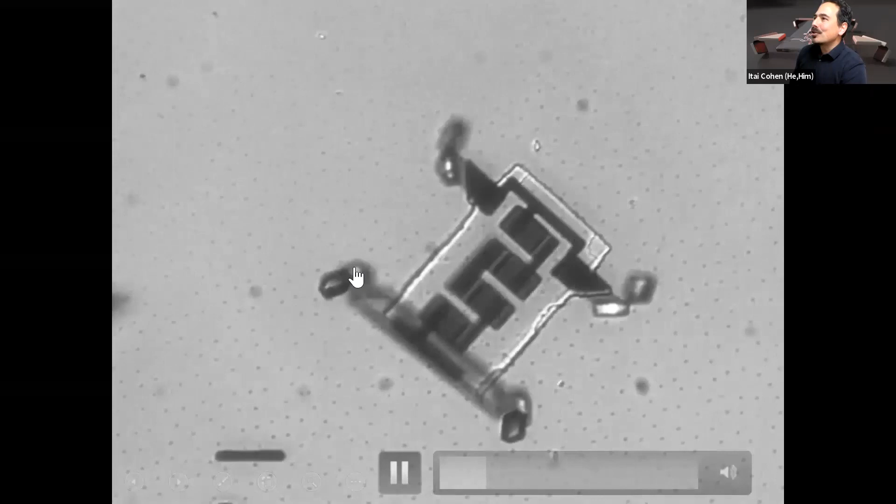And if you work really hard at eliminating the schmutz and getting the release process right, you can generate this robot. This is a 70 micron by 40 micron by 2 micron robot. This robot is so small that these little particles here on the side are moving in a Brownian fashion. This robot folds itself up, and by shining the laser on the front and then back photovoltaics, it walks itself off the page.

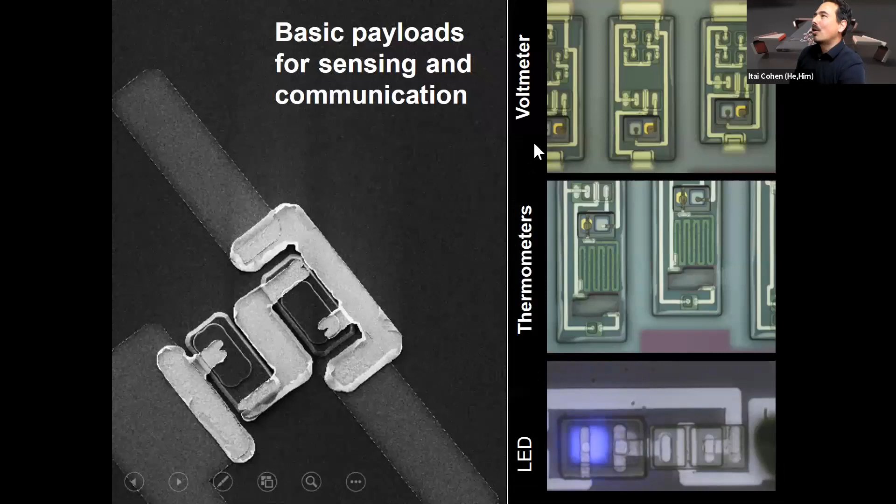Now, the amount of electronics that you could put on this robot is staggering. We can, of course, already put the payloads that I showed you in the very beginning that Al and Paul are making. That's trivial. Those are all at the scale of these robots. But on this 10 micron by 10 micron footprint, you could put an entire Intel 4004 chip if you're using a 50 nanometer line width process. The clock rate for these things could be a gigabit per second.

The Voyager 1, which just left our solar system, has a clock rate of 8 kilobits per second. So this device could hold something like the computational power of the spaceship Voyager. You can get 60 megabits of memory.

And at Cornell, we're starting to think seriously about how we would go about generating the brains for these to fabricate robots that really have sheet-like properties, but with little chips embedded on them, or ones that are individual units that we can put a brain on, or bubble rockets like you're seeing in the bottom here that can essentially maneuver with a brain on board to direct their patterns.

So the way we're doing this is we're collaborating with a company called XFab, and XFab has developed a silicon on insulator process similar to what John developed in his lab. And the idea is that we fabricate the chip and the photovoltaics, all the rest of that gets fabricated in XFab. It comes to us, and then we put on the legs and the rest of the infrastructure as needed. And with that, we can essentially start to design and marry the kinds of things that you can do with commercial foundries with the stuff that I've shown you here today.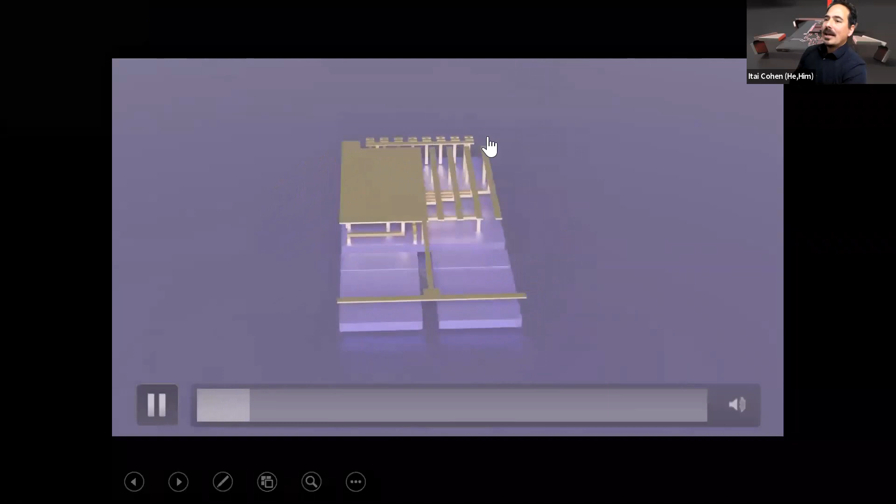So you get the chip from XFab, and then what we do is we pattern the platinum electrodes and the legs of the robot so that you can shine light on the photovoltaics, with the chip automatically giving you the locomotory gait so that you don't have to shine the laser on the front or back photovoltaic. All of that gets taken care of by the timing circuit.

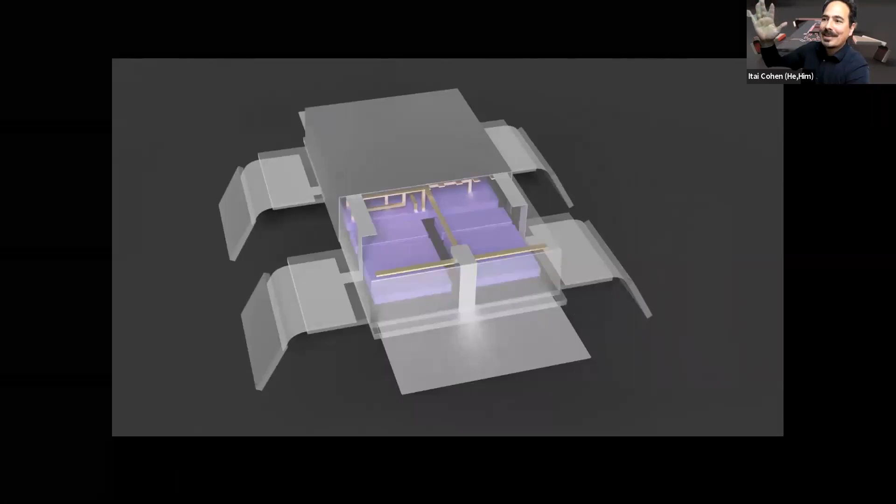And so how does this work? Here's a video of one of the released devices. I don't know if you can see it, but this bottom leg right here is moving in and out ever so slightly. This is our hello world from our first released device, which we literally got yesterday.

Also yesterday, we got our first electronically integrated cilia. So this is a chip where we just shine light on it. It's connected to a cilia, and when we play this movie, this oscillation from the cilia is all just coming from shining light and the chip doing the timing on its own.

You can connect 2 rows of cilia to get a metachronal wave in these cilia. So now these are beating at a different phase than these. And again, these are hot off the press, and it's only going to get more interesting from here on out. With Michael Rubinstein, we've been thinking about how to make more sophisticated brains for these devices.

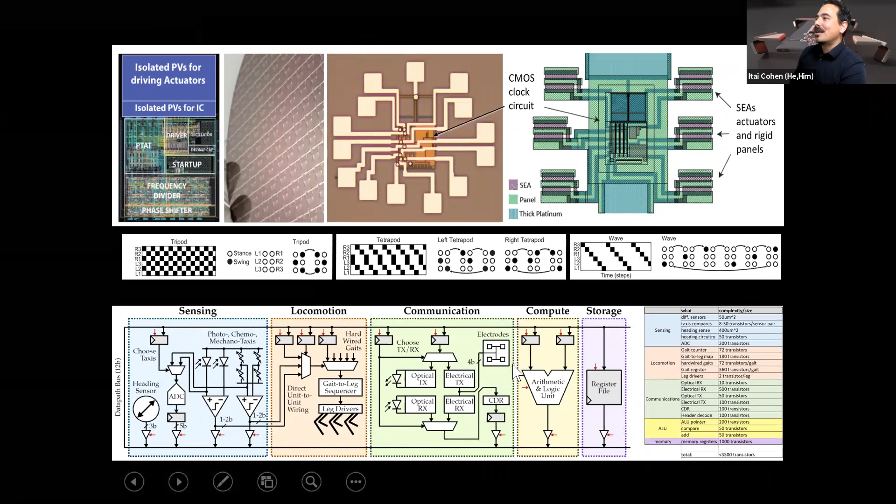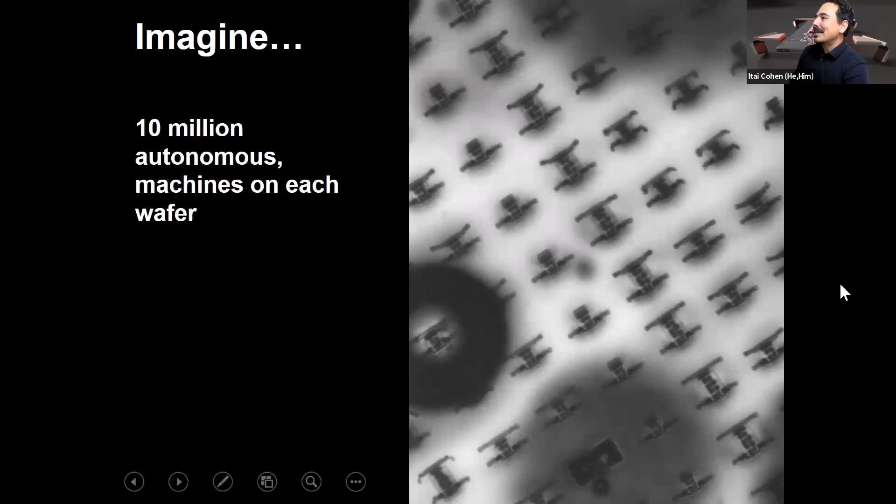And really, we're poised to make a world where we could suck these robots up into a hypodermic needle, inject them into different environments where there might be a paramecium that's crawling nearby. So what happens when we can make 10 million of these devices, release them en masse like you're seeing in this video, each device costing fractions of a penny, able to lift 10 times their weight, able to interact with biology at the scale of a single cell?

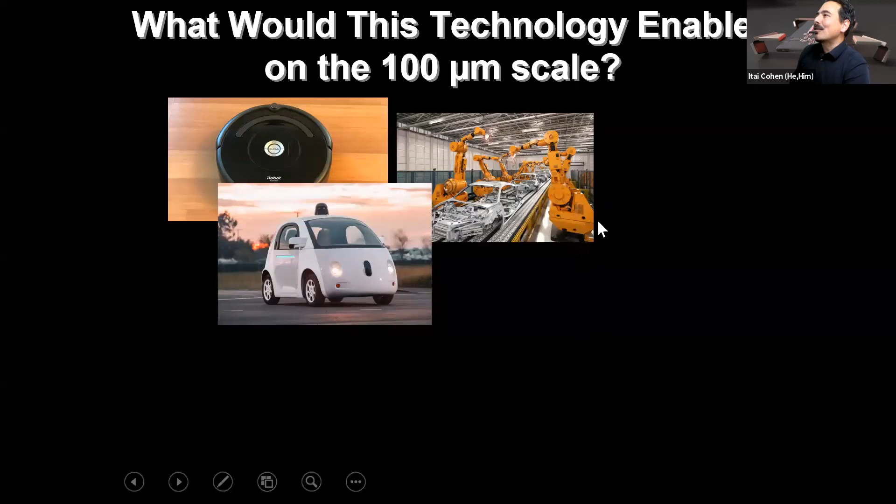What would you do if you can start to think about a Roomba at a scale of 100 microns, cleaning off some sort of artificial tissue, or having a microfactory that builds devices at this scale, or transports materials, or maybe a microsurgery machine that's operating at length scales that are an order of magnitude smaller than the Da Vinci machine can, or even rovers that explore environments.

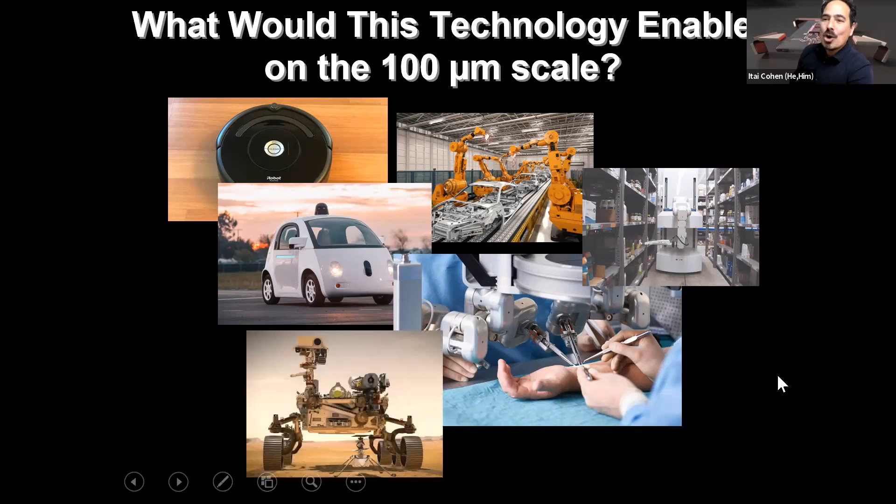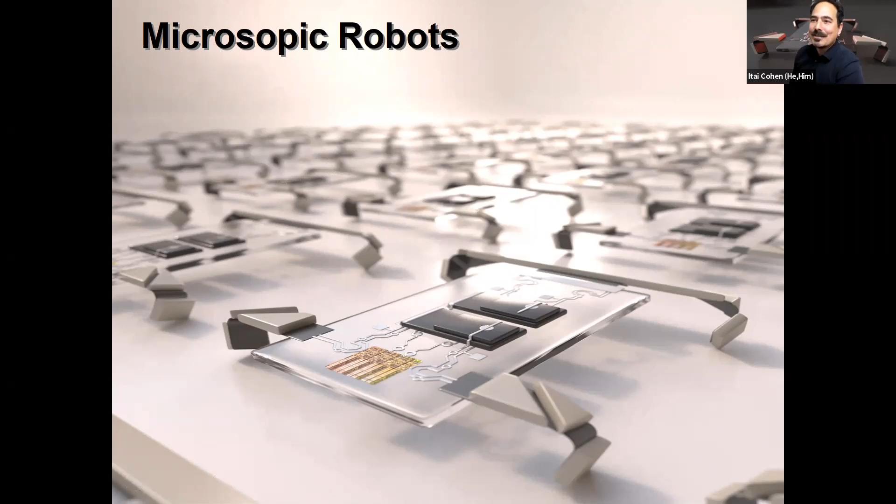Now we're not just interacting with biology through a microscope top down, but at the scale of tissues and organisms, really in a democratized way. So that's the vision of the microscopic robots. I hope I've shown you the kinds of things that might be possible someday with the technology that we're developing.

Of course, this work was done by an enormous number of people. The grad students, postdocs, and PIs have just been spectacular. And the credit really goes to this entire team for making this happen.

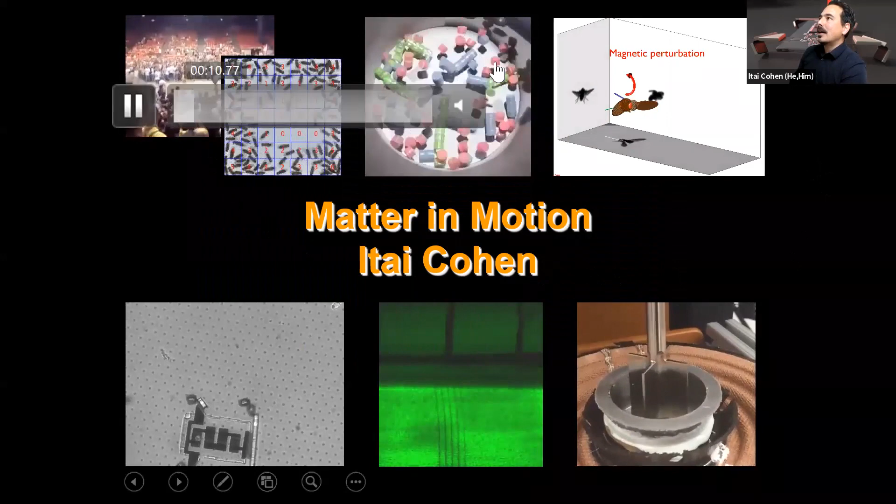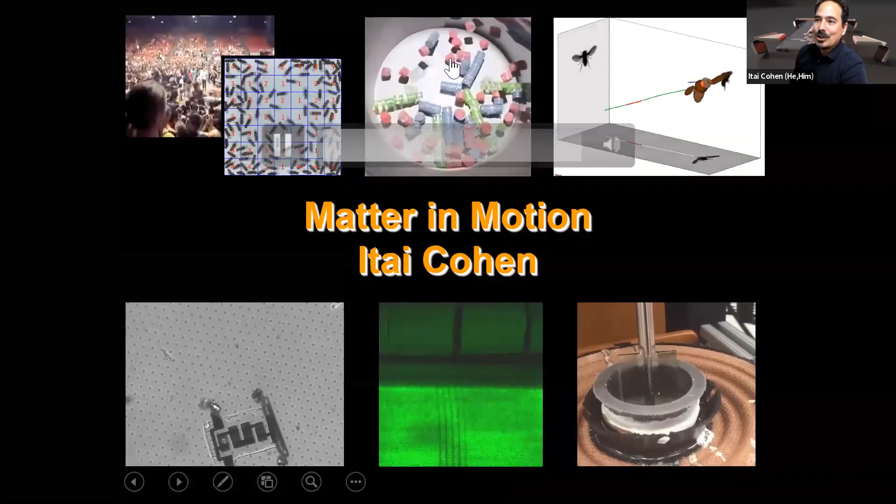I know it's noon, so I'm not going to talk too much about this slide, which is all the other things that we've started to do since I've had my mental breakdown at that conference. But these include looking at population behaviors, starting to think about magnetic handshake materials where you can create Watson-Crick pairing

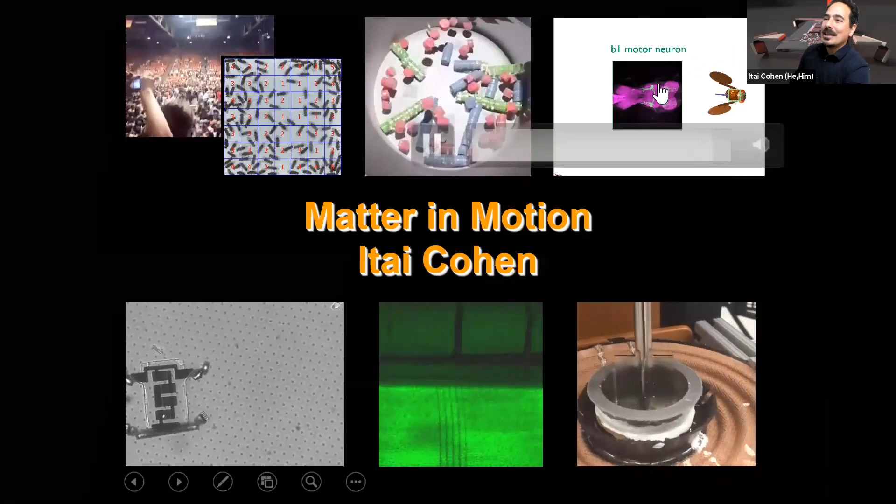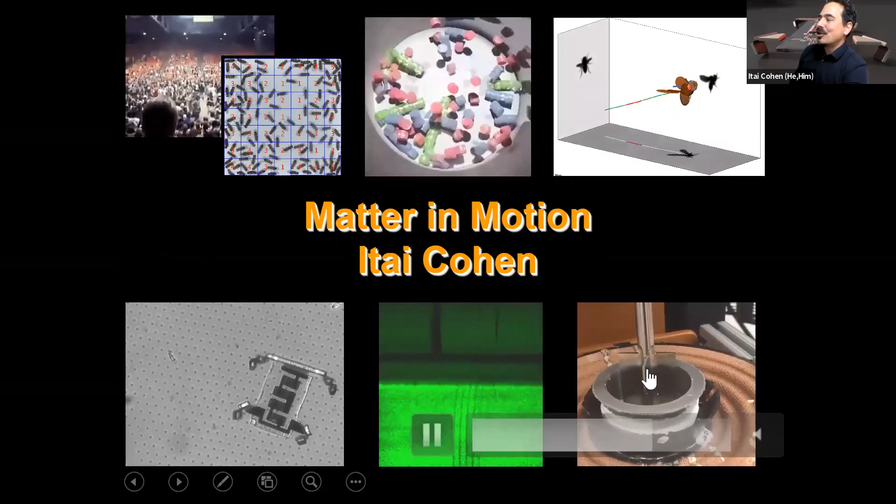of panels using dipoles, looking at the neuroscience of insect flight, where we can turn individual neurons on and off and see how that affects their behavior, their response to magnetic perturbations that we put in midair. Work that we're doing to connect cartilage mechanics with rigidity percolation phase transitions, and work that we're doing to understand the mesoscale structures that give shear thickening fluids their wonderful properties.

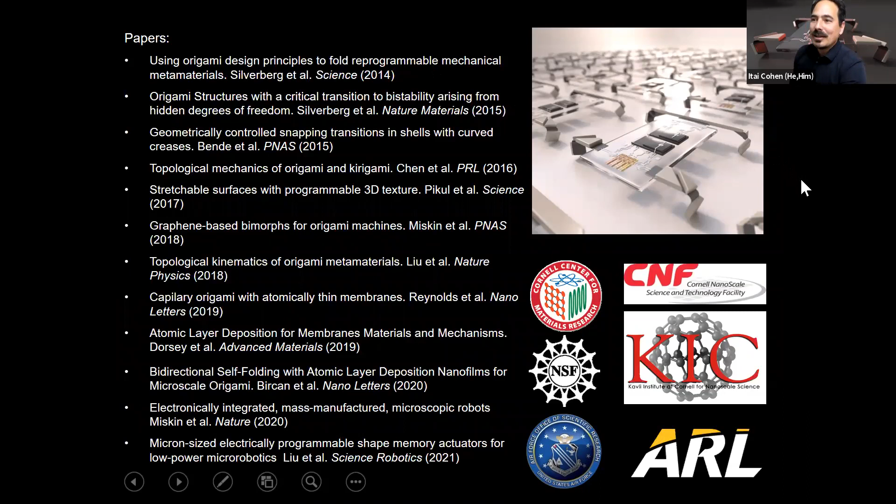And I'll just leave this slide up so that you can look up these papers if you're interested in the specifics of what we've done. And I'm happy to take any further questions.